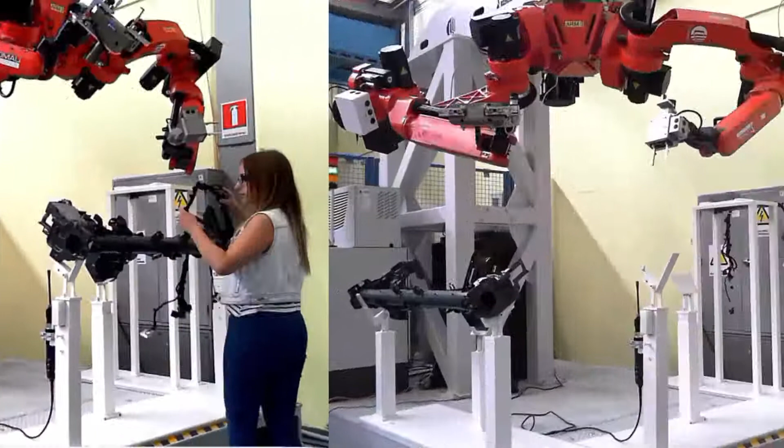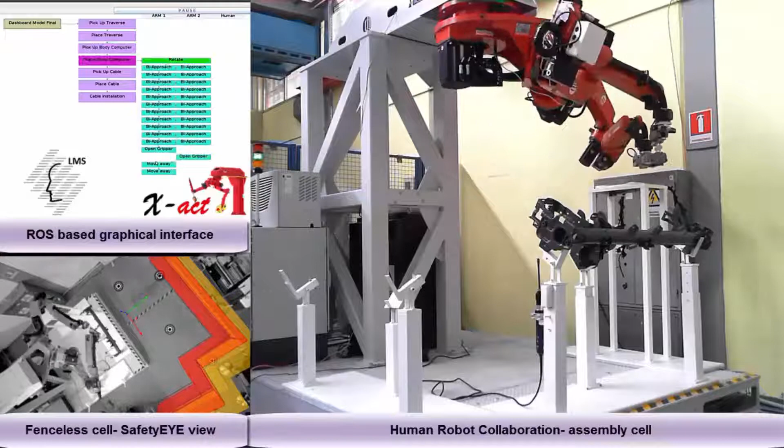The introduction of dual-arm robots in human-based assembly lines will eventually increase the automation level, enabling the human to work on value-added tasks and to reduce physical stress of the operators. In this direction, the adoption of dual-arm robots seems promising, as it allows for multitasking as well as space and cost efficiency by simplifying fixtures and gripping devices utilizing both arms for manipulation.

The dual gripper concept has been integrated into an industrial dual-arm robot, allowing the handling of big and heavy parts along with the smaller ones without requiring the changing of tools. These parts are not so heavy for robots, rather they are heavy for the human.

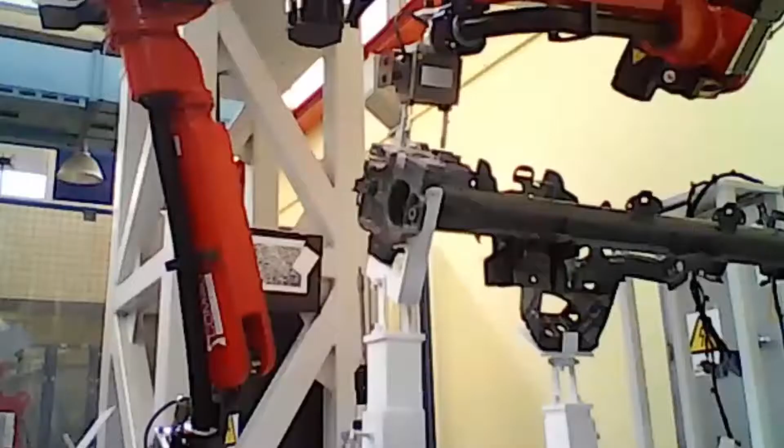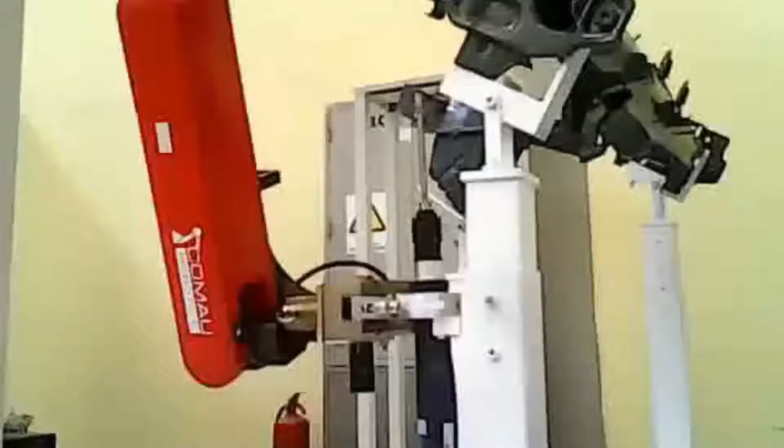Without changing grippers, the robot was used to manipulate both a traverse weighing 12 kilos and the fuse box weighing 500 grams, using a traditional push to start screwdriver, which can also be used by a human. The dual-arm robot was able to fasten screws on the fuse box with the same grippers.

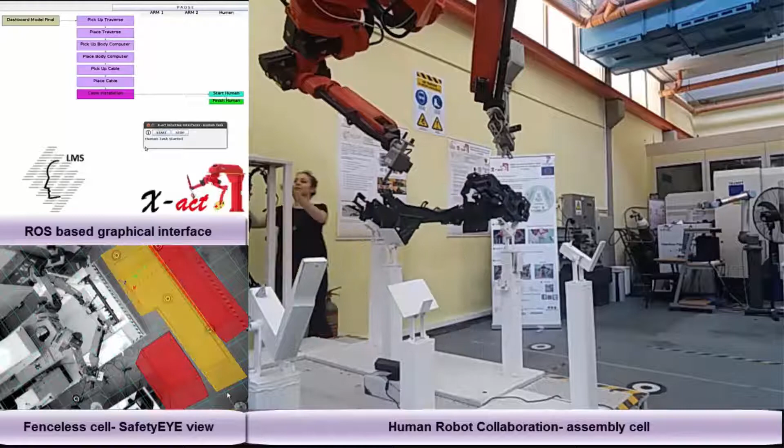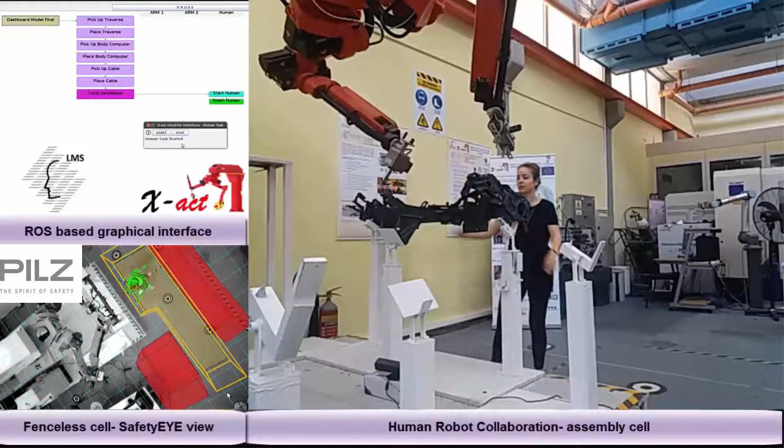There are still tasks that should be carried out by the human, such as the installation of a wire harness on the traverse of a vehicle dashboard. The human robot station controller allows the execution of both human and robot tasks in a safe way. The user is able to signal the start and the end of a human task via gestures, voice commands, or buttons on the user-friendly graphical interfaces.

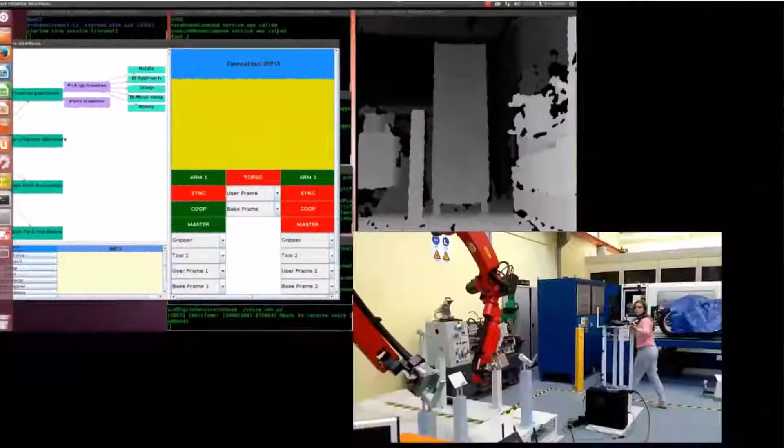In order for humans and robots to achieve a close coexistence, advanced and certified safety solutions are required. A high-level task description has been programmed in order to be easily monitored by a non-expert user. Intuitive human-machine interfaces have been developed, enabling the programming time reduction. In this direction, the user is able to move the robot by using external software tools.

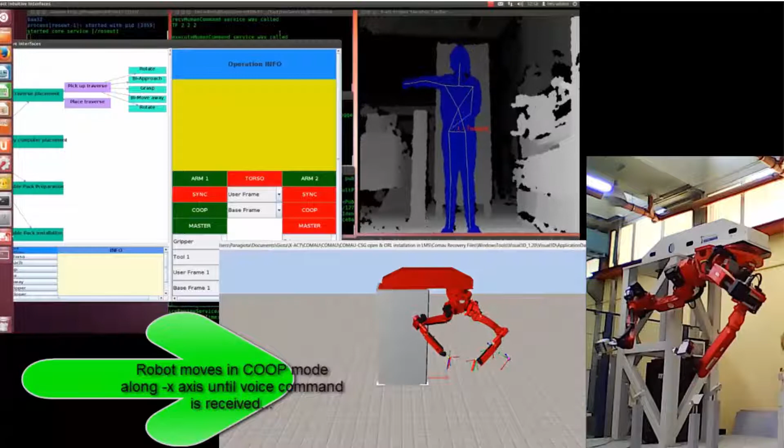The human can also move the dual-arm robot with simple body and hand gestures, as well as graphical interfaces. The cooperation of both arms is possible in this mode as well. The robot's speed is adjusted at a low level, following the same logic as that of the traditional programming approaches.

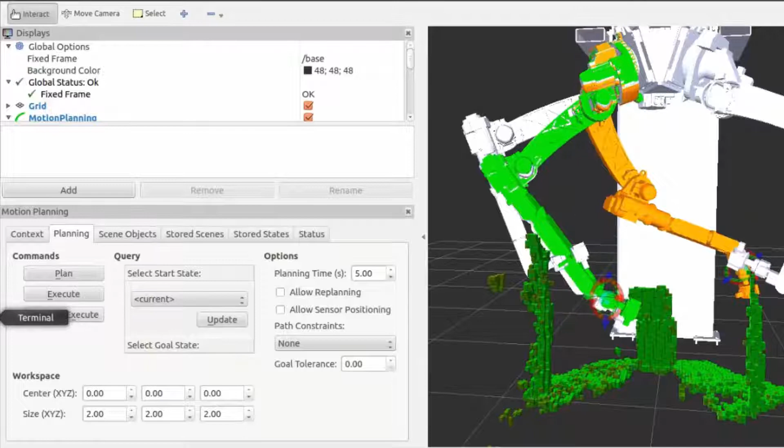Motion planning algorithms in combination with depth data have been also evaluated for the collision avoidance application. The user selects the target position in a simulation environment and a collision-free path is generated. The path is virtually generated before sending to the robot for execution.

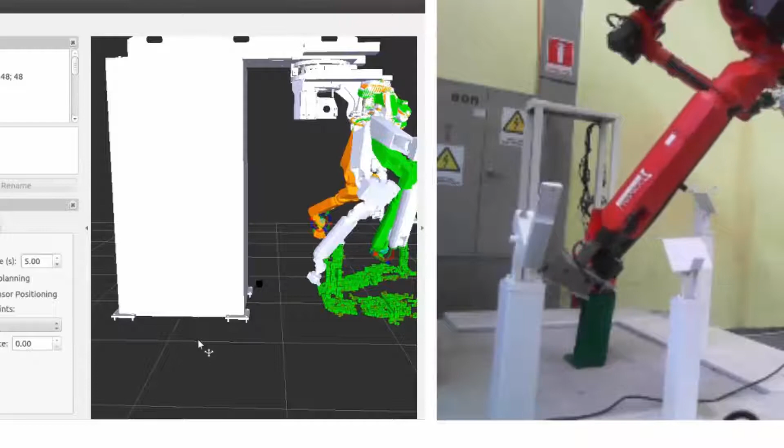LMS has also worked on the development of applications for dual-arm concurrent motion planning. A multi-criteria decision-making framework was used in order to allow the generation of dual-arm motion paths in the configuration space.

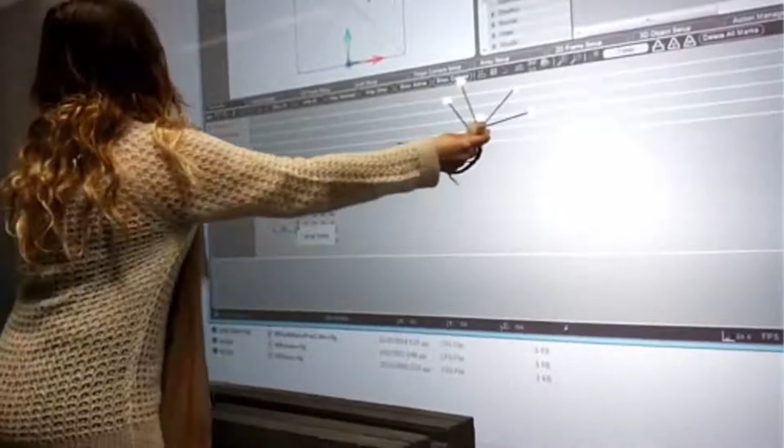The use of an alternative offline programming approach was proposed, enabling the dual-arm robot to mimic human motions. The human data were captured in a virtual reality environment and were further processed and sent to the robot for execution. In this way, the programming time is significantly reduced while accuracy issues still need to be improved.

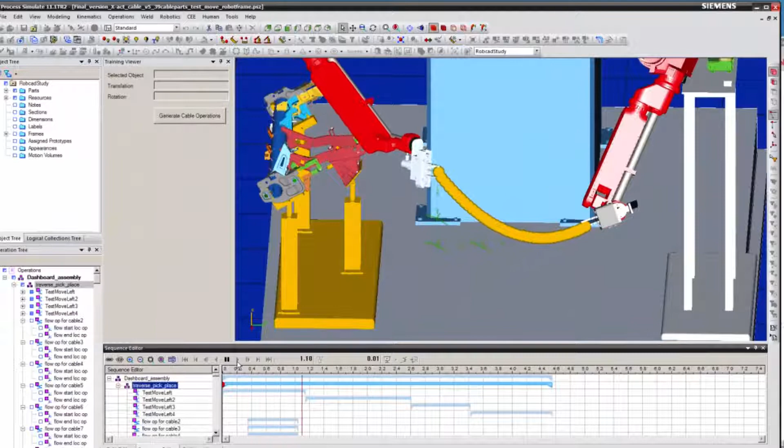The simulation of cables and wire harnesses was also investigated through the evaluation of different simulation platforms and physics engines. LMS has developed a new physics engine along with testing the existing ones.